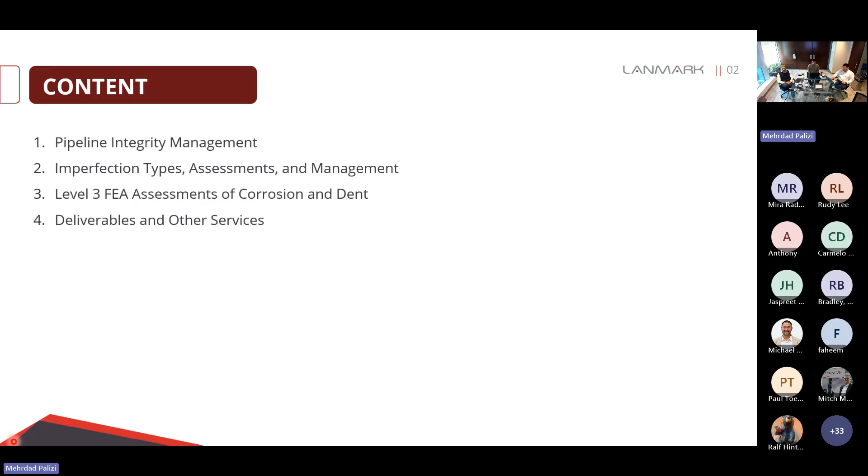So I'll start with an overview of pipeline integrity management, or PIM, and its key elements. Then I'll introduce the imperfection types covered in our program, explain their causes, assessment methods, categorization, and management at a high level. Next, I'll walk you through the process for Level 3 FEA assessment of pipelines with corrosion and dents. And finally, I'll present the typical deliverables for pipeline defect assessment projects and briefly introduce other stress engineering services we support.

As we all know, transmission pipelines provide a safe and efficient way to transport energy products over long distances. This network continues to expand and diversify with emerging services such as hydrogen blends, carbon dioxide, and biofuel transportation. As pipelines age and operating conditions change, threats can develop and grow over time. In case of transmission pipelines, failures are rare, but even a single event can have serious consequences, affecting public safety, the environment, business, and reputation.

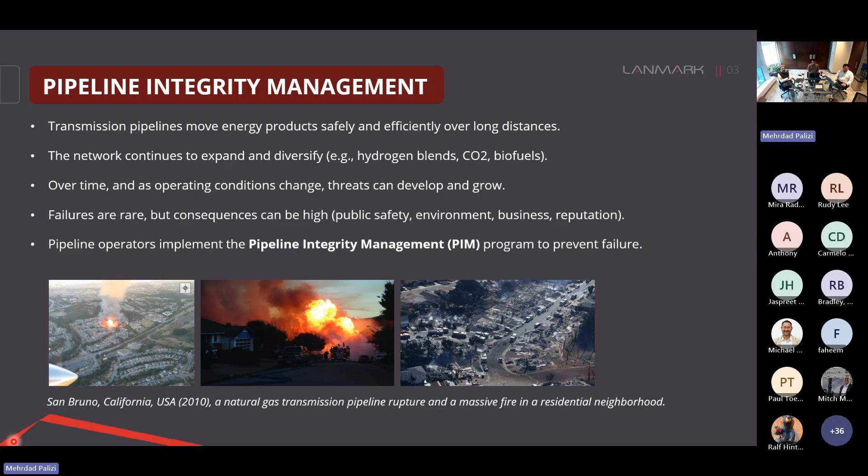In order to prevent failures, operators implement something called Pipeline Integrity Management, or PIM program. The images shown here are related to the 2010 San Bruno incident, where a natural gas pipeline ruptured in a populated area. This was because of a crack in a seam weld that grew unstably during a pressure excursion, caused a major explosion, and tragically killed 8 people. So we want to prevent incidents like this from happening.

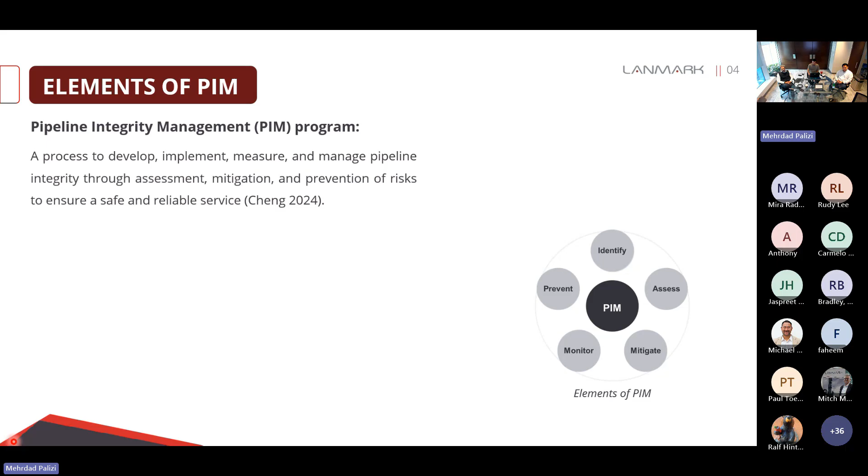So what is pipeline integrity management, or PIM? This is a structured process to develop, implement, measure, and manage pipeline integrity. It is done through assessment, investigation, mitigation, and risk prevention, to make sure that we have a safe and reliable service. A typical PIM, as shown in the figure, includes 5 essential elements: identification, assessment, mitigation, monitoring, and prevention. Let's take a look at each one of these elements in some more detail.

Caliper tools are used for measuring pipe inside geometry; they can detect deformation anomalies. We have magnetic flux leakage, or MFL, which is used to detect metal loss. Ultrasonic or UT tools measure wall thickness and are used for metal loss detection, and some models for crack detection. We also have electromagnetic tools that are mainly used for crack detection.

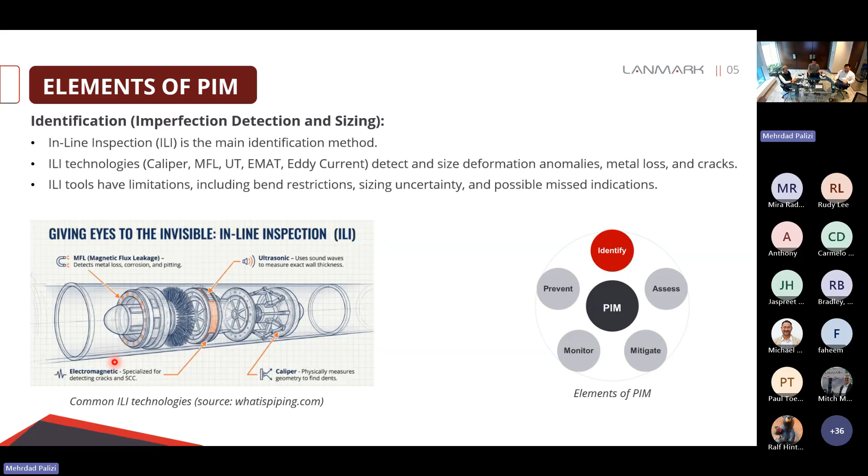ILI tools have practical limitations. They may not be able to pass through tight bends depending on the configuration of the tool. In addition, the ILI technologies have detection and sizing uncertainties. So here we have 2 examples of the technologies for corrosion.

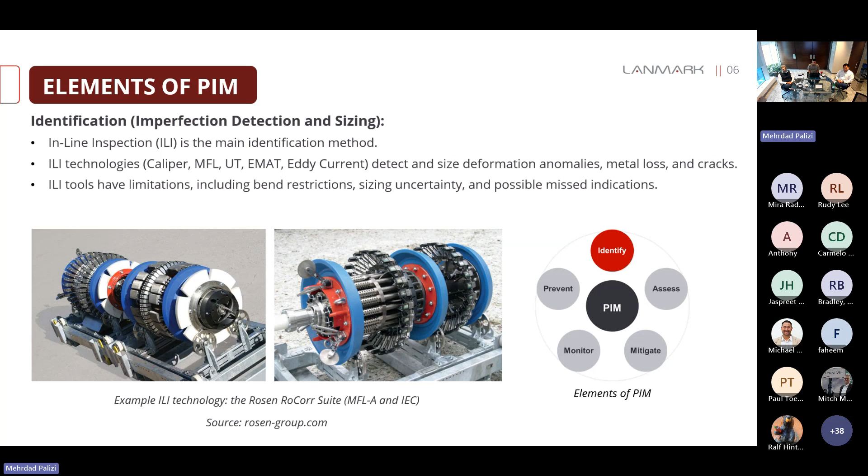MFLA is used for detecting and sizing metal loss, such as corrosion and pitting. IEC provides high-resolution detection for internal metal loss. Both these technologies have a minimum bend radius of about 1.5 times outside diameter. MFLA depth sizing is generally about 10 to 15% of the wall thickness, while IEC depth sizing is about 1.3 millimeter. Both technologies have a probability of detection of 80%.

The next element for PIM is assessment. This is where the collected data is used to make sound engineering decisions. The 3 main types of assessment include consequence, risk, and fitness for service, or FFS assessment.

Consequence assessment looks at the potential impacts of a pipeline failure over people, the environment, and operation in general. Risk assessment estimates the overall risk of a pipeline failure by combining the likelihood of that failure with its consequences. And finally, fitness for service, or FFS, checks whether a pipeline with identified imperfections can continue to operate safely under operating conditions. FFS is the focus of this presentation.

Here we are using ILI data, operating conditions, and maintenance records to assess immediate and future integrity of the pipeline. This is done typically by estimating the failure pressure and remaining life because of wall thinning or fatigue failure.

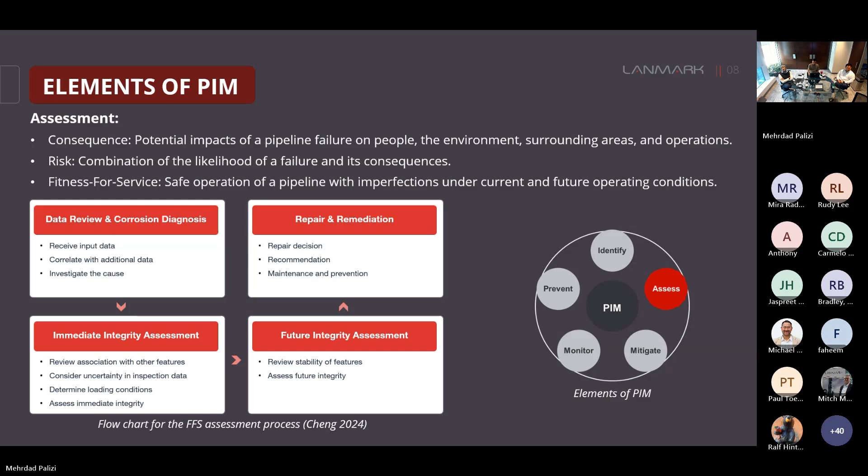Next, we have mitigation. This might be required when FFS is showing that an imperfection is unacceptable. After excavation and field inspection, if the defect was present and as severe as it shows itself in the ILI data, then a repair should be applied. There are different types of repairs depending on the type of defect and its severity. Common options include pipe replacement, composite sleeves, grinding, and metallic sleeves.

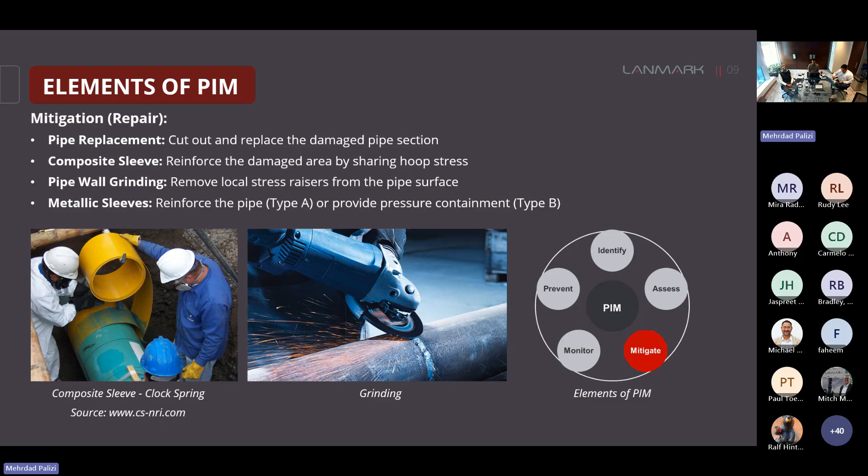Pipe replacement removes the damaged section of the pipe. However, this method requires line outage and it is not preferred. Composite sleeves reinforce the pipe by sharing the hoop stress, so they can be used for longitudinal defects. Grinding basically removes the local stress risers over the pipe.

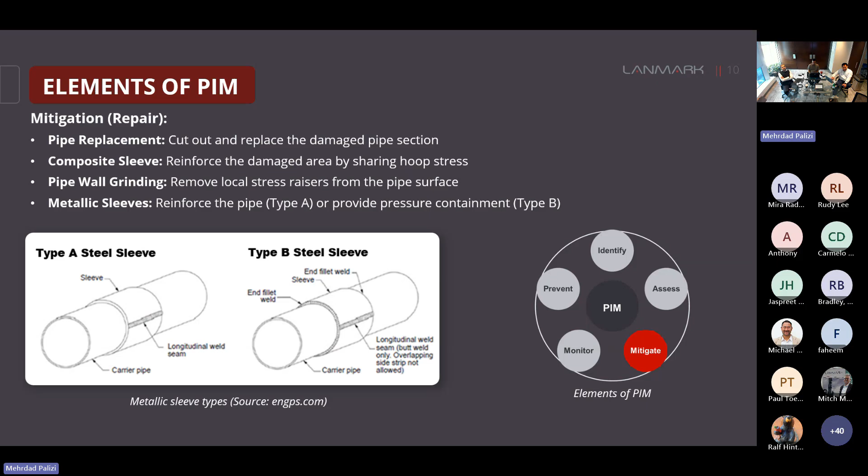We also have metallic sleeves that are commonly available in two forms. Type A sleeves provide reinforcement, and in type B, we have the sleeve welded to the pipe. This type provides pressure containment, and it is generally used for more severe defects for which we might have leakage.

Next, we have monitoring. This is going to be the ongoing follow-up component for integrity management. Operating conditions like pressure, temperature, and flow rates can be monitored continuously. But for most integrity threats, the monitoring is performed periodically.

This typically is done through repeat ILI runs to identify new imperfections, and we can also track the growth of known features. There is also non-destructive testing that is used to verify ILI findings, improve sizing accuracy, and at the same time it could also be used when ILI capabilities are limited.

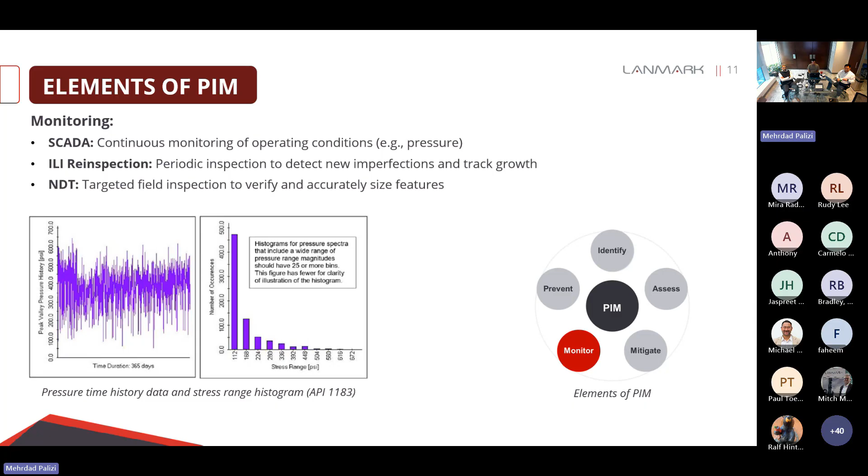So let's say if we have a girth weld for which we have a high demand of stress or strain, we can do the inspection over that with non-destructive testing.

The last element of PIM is prevention. Prevention starts early. One of the things is having a strong quality assurance and quality control during manufacturing and construction. This can help us to reduce defects from the beginning of the line life cycle.

Also, during operations, there are activities that we can do, including having an effective inspection program, excavation damage prevention, real-time surveillance, having procedures for repair, response planning, and emergency shutdown systems.

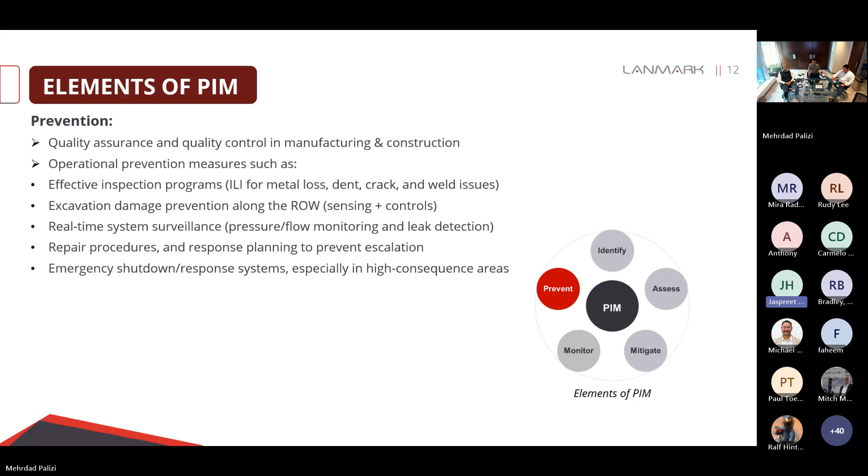Okay, so next I'm going to talk about the primary imperfection categories that we have in our program.

The first feature is corrosion. Corrosion is the most common time-dependent integrity threat for pipelines, especially the ones that are buried. There are two types of corrosion, external and internal. External corrosion is more common. It is driven by electrochemical reactions between the pipe steel and surrounding environment.

External corrosion is controlled by coating and CP. External corrosion starts when the coating degrades or fails. It becomes more severe when CP cannot effectively reach the steel. There is also internal corrosion. It is generally less common in transmission lines, but it can occur when water or deposits accumulate inside the pipe.

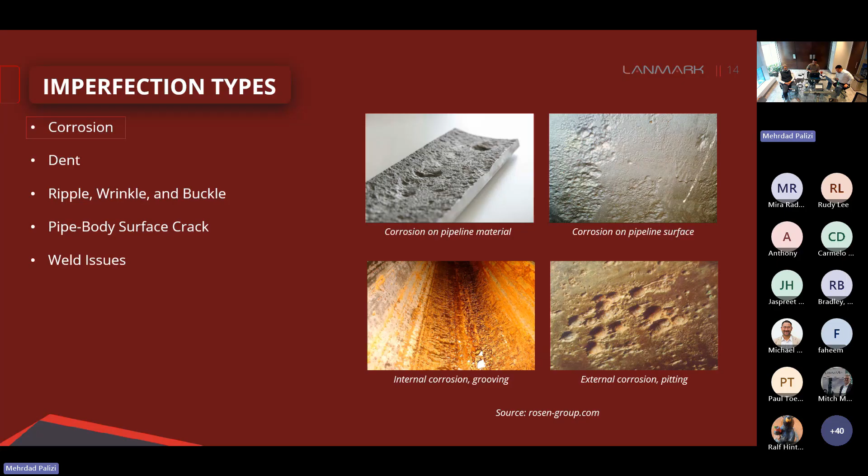Next, we have dents. This is going to be an inward plastic deformation of the pipe wall. It is usually caused by external mechanical forces, such as construction activities or third-party excavations. It can also occur when the pipe is forced against a hard object below the pipe, such as rocks or buried debris.

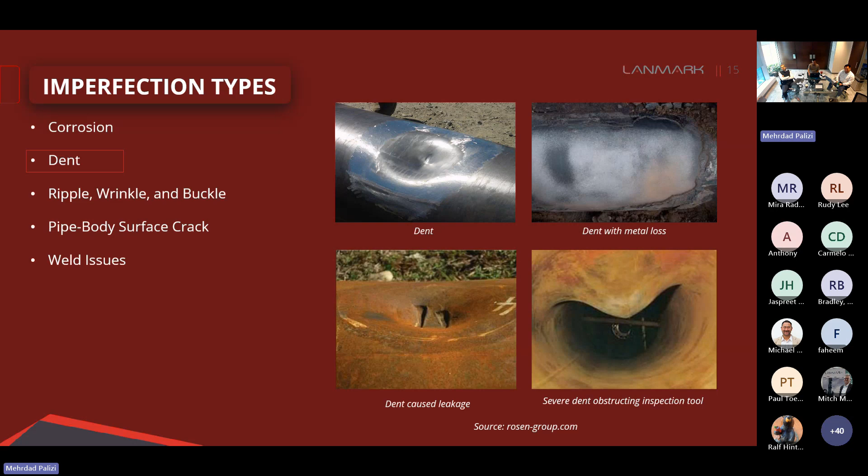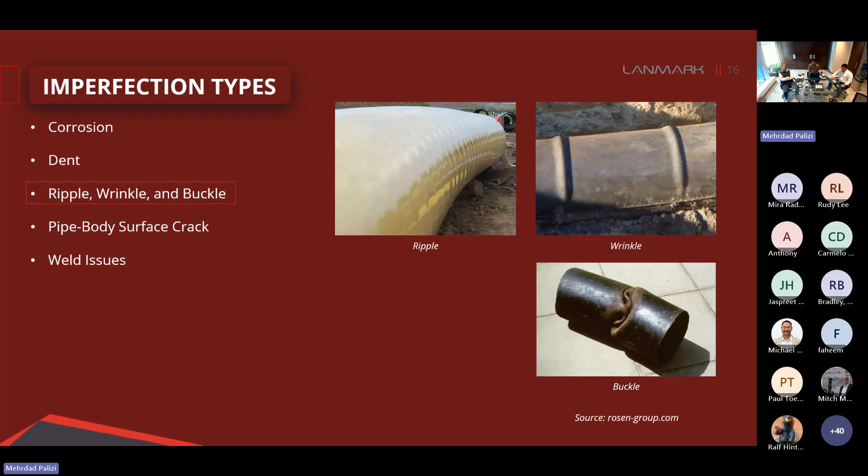Next, we have buckle-type features, including ripple, wrinkle, and buckle. These features are caused by a local compressive load over the pipe. The source of this load could be pipe bending, ground movement, or installation issues.

Surface cracks over the pipe body. This is another important feature. One common mechanism here is environmentally assisted cracking, particularly stress corrosion cracking or SCC. Here we have tensile stresses working together with a corrosive environment to initiate and grow cracks.

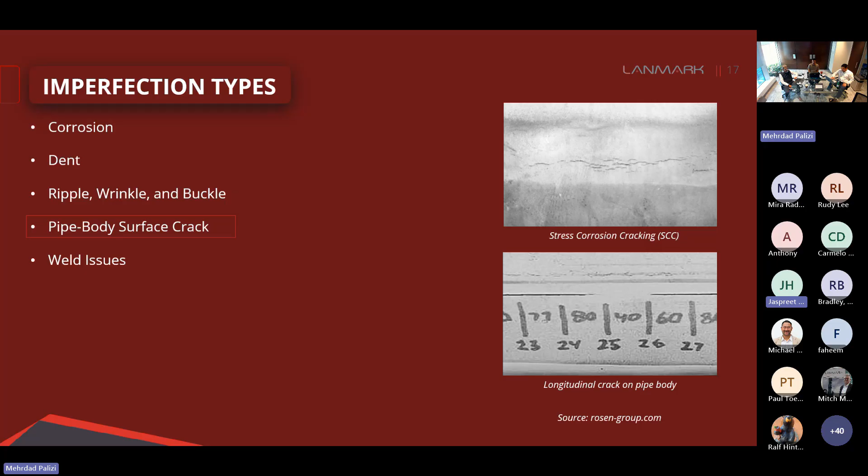Cracks can also grow by fatigue. This is going to be over the critical locations that we have stress concentration. There is higher levels of stress and strain at this location, and during pressure cycling, cracks can develop and grow over time.

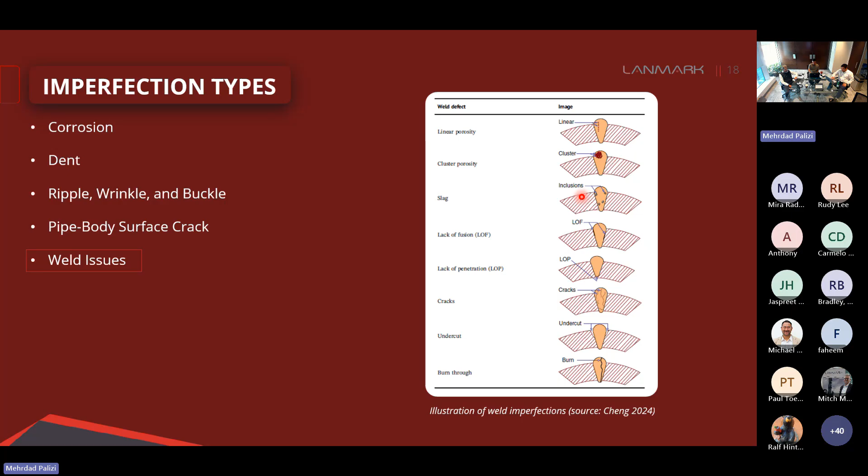And finally, one other category is weld imperfections over seam and girth welds. So here we might have planar flaws such as cracks, undercutting, or lack of fusion. They could also be volumetric flaws like cluster porosity, slag inclusion, or lack of penetration.

Weld areas are more susceptible in comparison with the pipe body. This is because the weld and heat affected zone around it might have different metallurgy. There might also be residual stresses at these locations if post-weld heat treatment is not performed.

The main integrity concern about weld issues is that they might behave like cracks, and under operating conditions, they might grow over time.

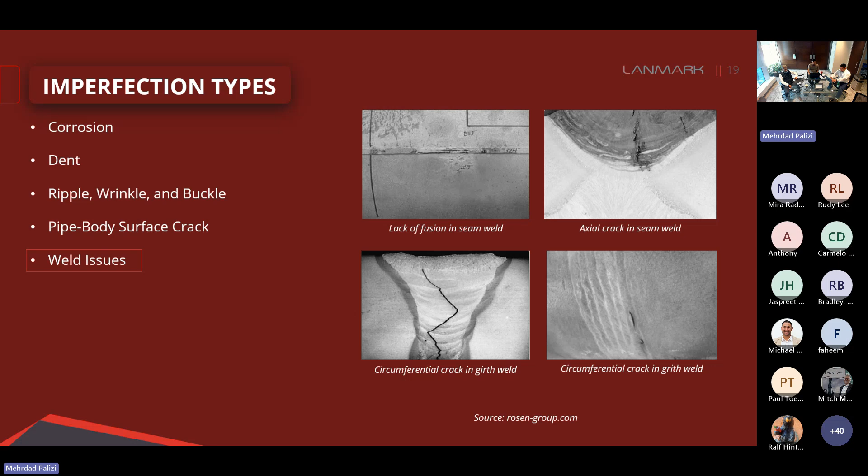Any questions so far?

So in our program in Canada, we are using CSA Z662, Section 10, Evaluation of Imperfections, as our basis. This provides the screening limits to us and then directs us to more detailed engineering assessment when those limits are not satisfied. For doing engineering assessment over corrosion, we are using ASME B31G together with the supporting reports and technical papers in this manual.

Dents are assessed based on API 1183. API 579 is used for assessment over cracks and weld issues that are behaving like cracks. In order to do this, we are using Part 9 in this standard. We are also using Annex 2D here to do level 3 assessment over corrosion. And finally, we have ASME B31.8S that is providing us the basis for doing categorization over defects.

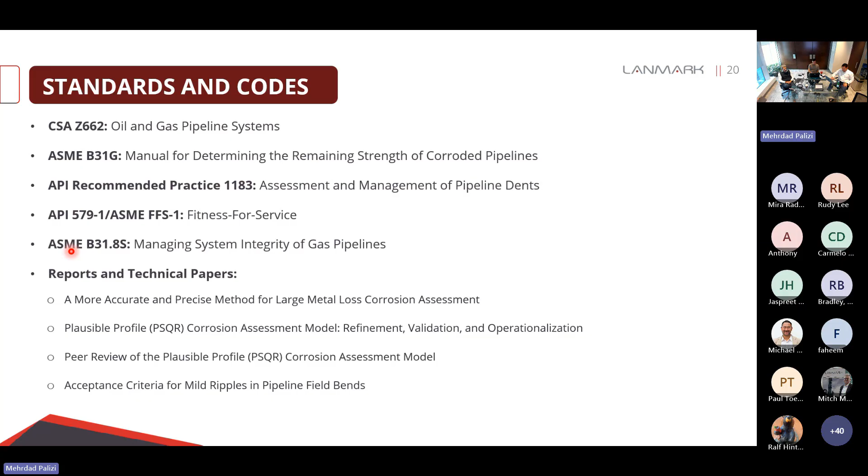So there's some consideration when we are performing imperfection assessment. Here I have 3 notes that I go through one by one. The first thing is we are not assessing features only in their as-found condition.

There's some features that are time dependent, let's say corrosion. For these features, it is important that we have an estimation over the growth rate. This could be done by reviewing the historical ILI data. We might also do a literature review and come up with a conservative value.

After we figure out what is the growth rate for each one of the features, we should project them to the time for the next ILI inspection. Then we're going to perform FFS.

This is going to be performed for both the current and projected condition of the features. Key outputs here include the failure pressure and remaining life. In the case of corrosion, this remaining life is because of wall thinning. And in the case of cracks and dents, it is going to be governed by fatigue failure.

Then we're going to have categorization and action planning for each one of the features. So we categorize features as immediate, scheduled, or monitored. Immediate features are the ones that are unacceptable at the current condition.

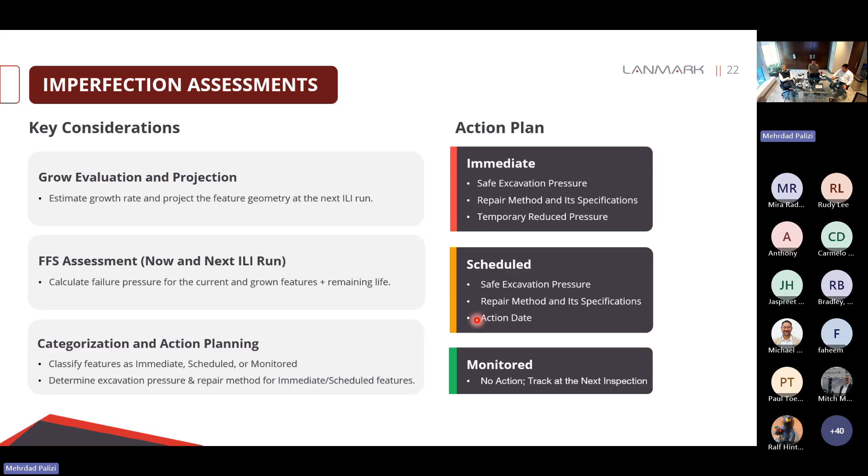In the case of scheduled features, we should also provide what is the deadline for doing that repair.

So when we are doing imperfection assessment, we are generally using a three-level approach. Level one is screening. Here we are using fast, simple checks based on the feature dimension and operating data. It is basically for screening out low-risk features. Then we have level two assessment, which is going to be more detailed.

Here we are using the elaborated data for our features. Let's say in the case of corrosion, we are using the thickness grids for the corroded area. In the case of the dent, we are using the deformation data, specifically the longitudinal and transverse profiles through the peak of the dent.

And then we have level three assessment. Here we are using numerical methods like finite element analysis. It is used for features that are too complex for doing level one or level two assessment over them, or based on those levels, the feature is unacceptable.

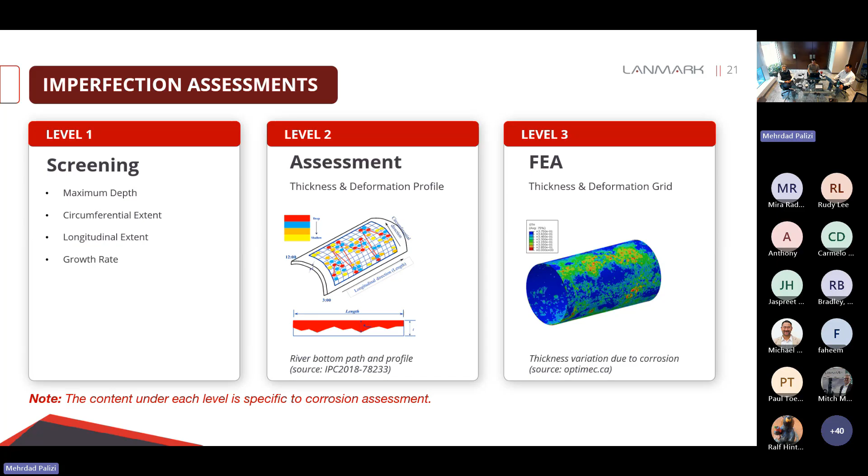This slide shows the three-level approach we apply at Lanmark for assessing different types of imperfections. For corrosion assessment, we start with CSA screening, then progress to ASME B31G modified formulation. If the data is available, we can also do an effective area method.

If the feature still fails at level one, we move to level two and do an RSTRENG or PSQR modeling over that feature. We can also go to level three and perform a finite element analysis based on API 579 Annex 2D.

Similarly, for the rest of the features such as dent, buckle-type features, cracks, and crack-like issues, we have methods for analysis in three levels. In future webinars, we'll go through the details of these imperfection types and the assessment for each one.

In terms of commercial software, we use Abaqus, Fe-safe, and Isight for finite element analysis. For corrosion, we use RSTRENG+ and KAPA. For cracks and crack-like issues, we use KAPA and INSPECT. We also have internal Python scripts to assess deformation anomalies and perform CSA screening.

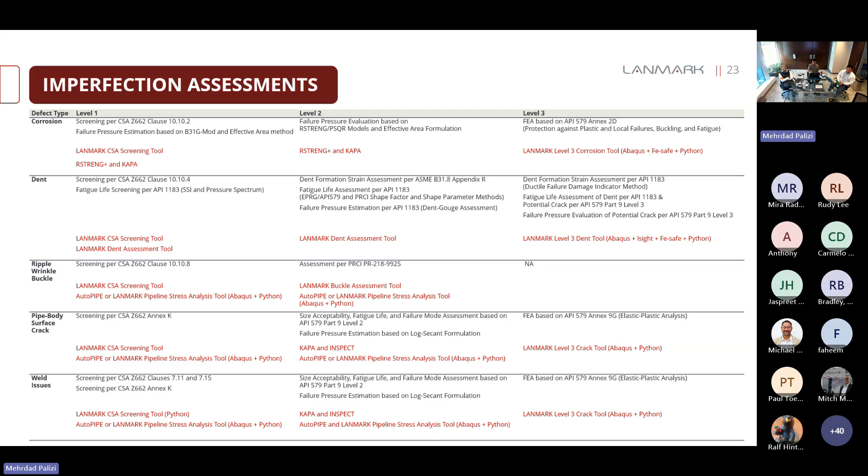In some cases, such as a circumferential pipe body crack, a crack-like flaw over the girth weld, or buckle-type imperfections, the longitudinal stress is the driving force, not the hoop stress. In these cases, it's essential to have an accurate assessment of the stress state at that feature location. This can be done using AutoPipe, or we can use our internal pipeline stress analysis tool.

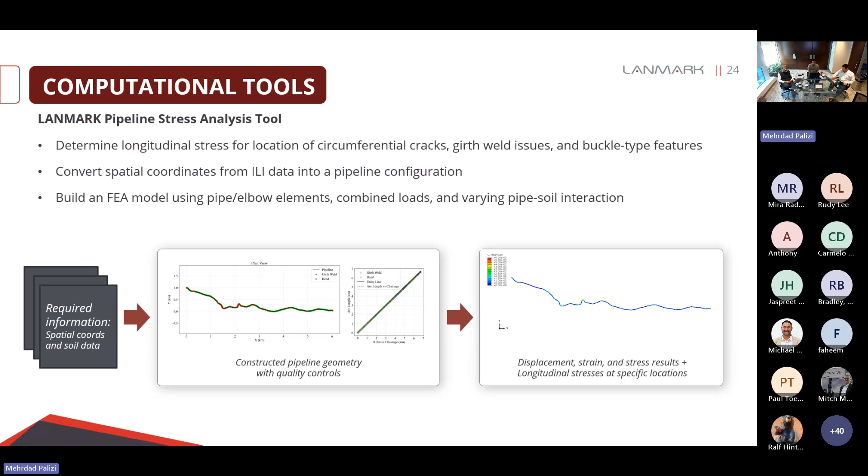Our internal tool is an Abaqus Python script. It builds the pipeline configuration directly from ILI coordinates. We use pipe and elbow elements, with plasticity and nonlinear geometry included, and we can also include varying pipe-soil interaction if that data is available.

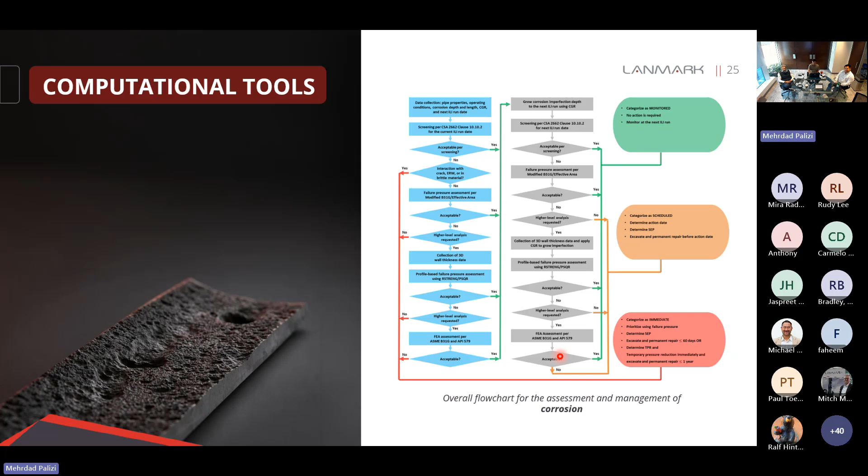When a feature is unacceptable, no matter what level of analysis we applied, we can use CSA Z662 Table 10.2 to select an appropriate permanent repair method. The table here is just...

We have a question: is it possible to reduce corrosion in these pipes by using caustic? Sorry, can you say that again please? Is it possible to reduce corrosion in these pipes by using caustic?

That may be a question we'll have to come back to. This is more of a defect assessment webinar, so I don't have that answer right away, but we can get back if the person shares their detailed contact details. Okay, thank you.

So the table here is just part of the table from CSA Z662, Table 10.2. The table is focused on metal loss defects. In the case of corrosion, the code allows us to do pipe replacement. We might also apply different types of repair sleeves. If using composite reinforcement, the metal loss should be less than 80% of the nominal wall thickness.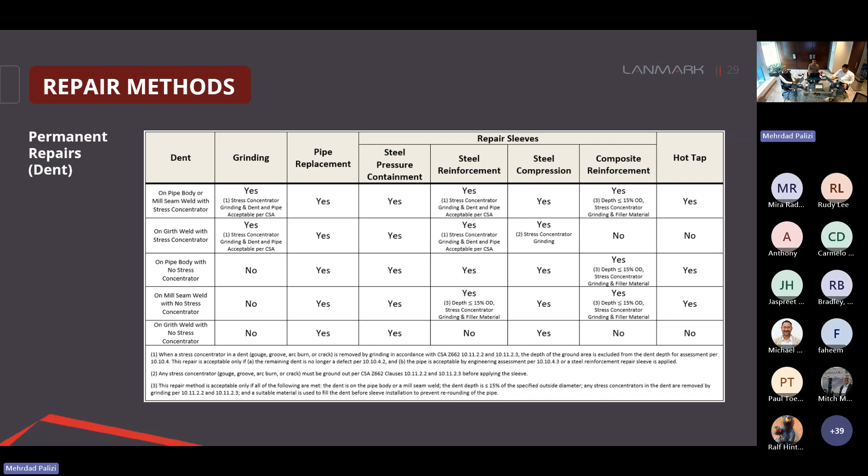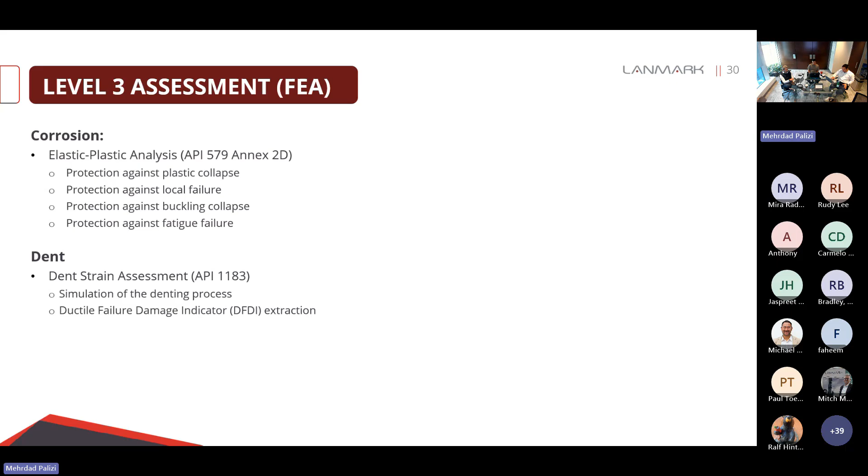Next I'm going to talk about two level 3 assessments, for corrosion and dents. We're going to focus on the general workflow and some technical considerations, starting with the assessment for corrosion.

In the case of corrosion, CSA Z662 and ASME B31G are useful for doing level 1 or level 2 assessment. ASME B31G provides some general guidelines for level 3 assessment, but it's not detailed or step-by-step. Because of this, we adapt the stress analysis framework in API 579 Annex 2D for doing level 3 assessment over corrosion.

It's important to mention this code itself is based on the ASME Boiler and Pressure Vessel Code, Section 8, Division 2, Part 5, which is the code used for design by analysis over pressure vessels. So if we have a pressure vessel with complexity in its geometry or loading condition, this is the code used for designing those types of structures.

One other important thing is that the approach in Annex 2D is not just limited to corrosion. It can be used for many types of imperfections. In the next slide, I'm going to show you one example related to shell distortion. But generally, the steps will be the same as when we're doing analysis over corrosion.

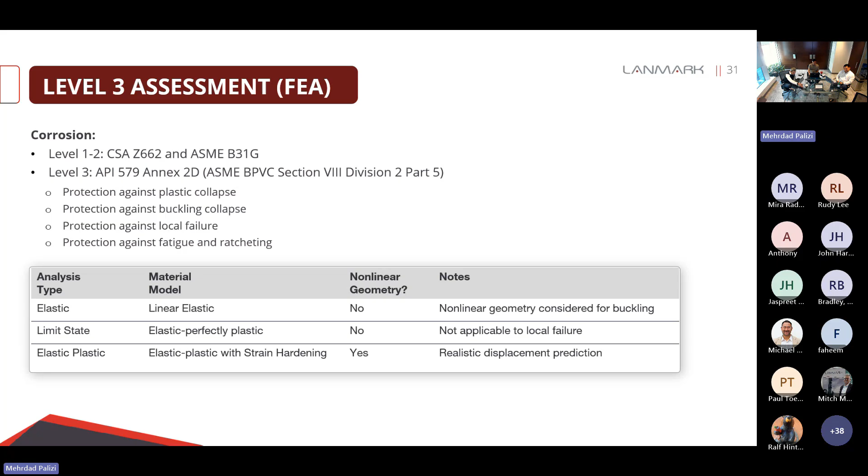So let's go through one example. This is an example in API 579 example problem manual. This is example 7 in section 8. It was actually added to the book recently. It illustrates the main steps for doing an elastoplastic analysis using Annex 2D.

The structure that we have here is a vertical pressure vessel. It is subjected to internal and external pressure. We also have dead load, and there is also wind applied to the structure. This structure contains some shell distortion, and we're going to use Annex 2D to make sure that the structure is safe.

So the first step for doing this type of analysis is to create the CAD geometry in the finite element software that we have here. And then we're going to do discretization over this model, so we're going to have a meshing applied over this geometry.

Once we have that discretization, now we can model the imperfection. So let's say in the case of the shell distortion, we can do this by adjusting the nodal coordinates in the input file in Abaqus. The input file in Abaqus is a text file, and we can go through that text file through scripting and change the coordinates of the nodes. This way we can have shell distortion applied over a structure.

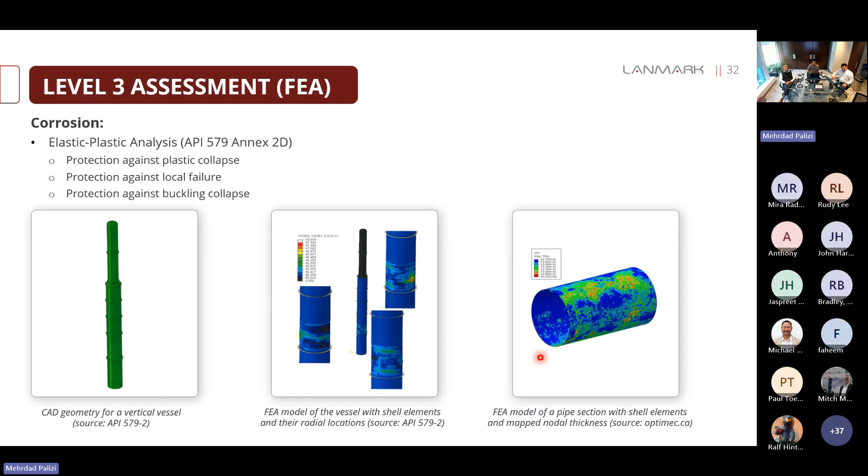So after we did the modeling for the geometry, discretized it, applied the imperfections, and applied the boundary conditions, now we can go and do those checks one by one. The first check that we have is protection against plastic collapse. So what we do is we go into table 2D3.

This is going to give us the load combinations and factors for elastoplastic analysis. We go into the global criteria. Here we have two load cases that are relevant to our structure: one is for internal pressure and gravity, the other one is for the time that we also have wind load applied to the structure.

We apply these loads over the structure, and then two things can happen. When we are running our analysis, we might get convergence, which means that our structure is safe against plastic collapse, and we might get divergence. If we got divergence and we are sure that every setting in our model is correct, then that could be an indication that the structure is not able to tolerate that level of loading.

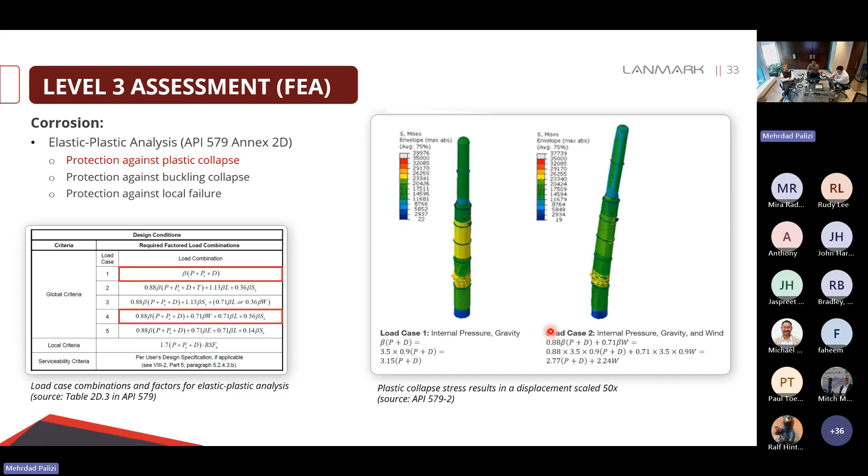The second check is for buckling collapse. If we are doing linear analysis, this is going to be very different from plastic collapse. But in the case of the elastoplastic analysis, we are basically doing the same procedure. The only difference here is that for buckling analysis, we are applying the load cases that are producing compressive stresses inside the structure. So for this example, we have the same load combinations, but instead of internal pressure, we're going to apply external pressure.

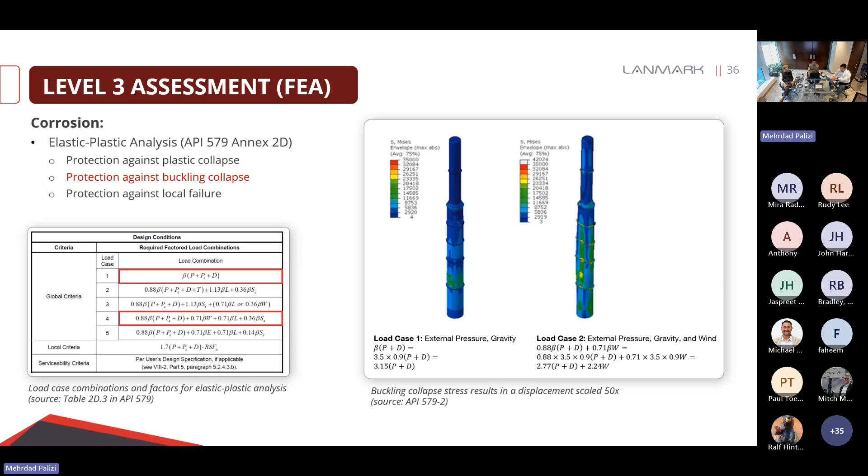So finally, we got the check against the local failure. Here again, in table 2D3, we're going to have the relevant load combination. We're going to apply this load combination over the structure, and then we're going to get different principal stresses, von Mises stress, and equivalent plastic strain. Based on these variables, we're going to have a calculation for a strain-based failure limit. I'm going to go into details for what this limit is. But for now, we're going to do the calculation for that limit at every point in our model. We're going to get the maximum value. If the maximum value was less than 1, that means our structure is safe against local failure.

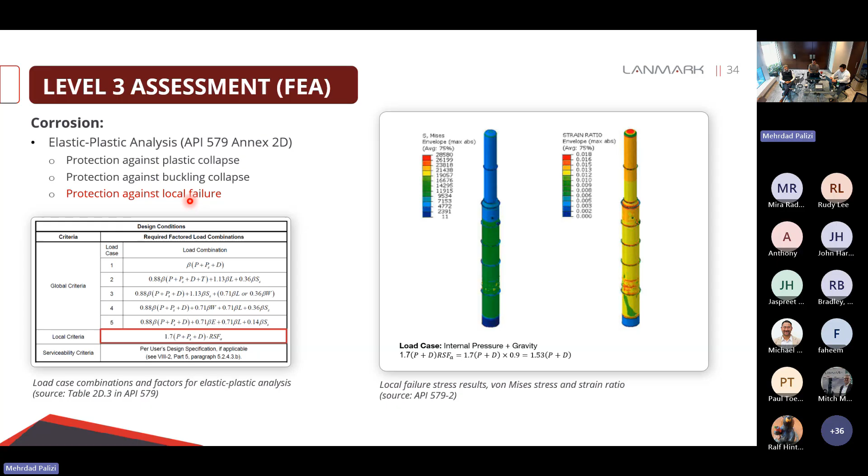But what is that strain ratio? That's the strain-based failure criteria. It is a strain ratio, basically demand divided by capacity. The demand is equivalent plastic strain, and the capacity is something called limiting strain. So let's go through the calculation for an example and see how this is done.

So the first thing is we should know what type of material we are working with, what is the yield stress and tensile stress for that material. Actually, we need the ratio of yield to tensile stresses. We also have some outputs from our finite element software: the principal stresses and the equivalent plastic strain. So what we do is calculate the average stress and the von Mises stress, and then calculate the ratio of the average stress to von Mises stress. This is an important variable, called the stress triaxiality. In many failure criteria, you might see this ratio.

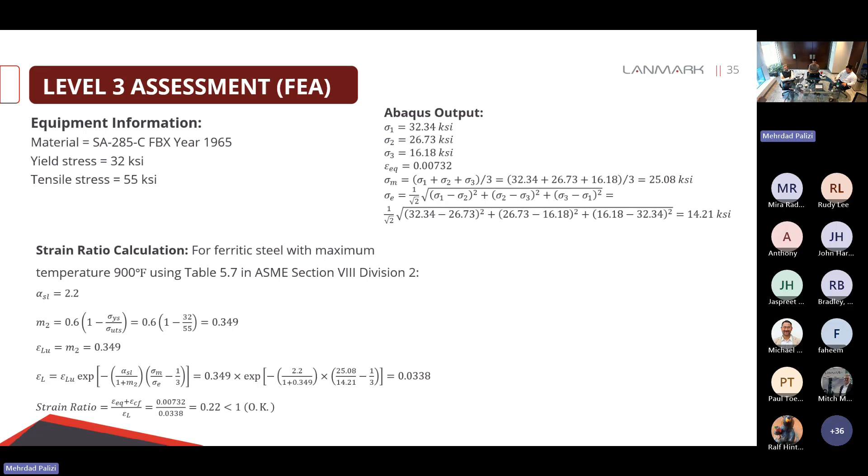So after those calculations, we're going to get some material properties. We go into table 5.7 in the ASME Boiler and Pressure Vessel Code, Section 8, Division 2, to get the material constants. This is the limiting strain, but just for the case of uniaxial stress. So if we put it into this relation, we're generalizing it for the multi-axial stress state we're dealing with. We get the limiting strain, and then equivalent plastic strain divided by limiting strain. If the value is less than 1, that point in the structure is okay against local failure. Any questions so far?

So next, I'm going to talk about the level 3 assessment for dents. In the case of dents, we have two main steps. The first step is dent strain assessment. Basically, we want to quantify the amount of damage in that indented area at the time we had the indentation. The second part is doing FFS assessment, for the fatigue failure of the dent. If in the first step we got a severe dent, then probably we're going to have a crack inside that dent, and we should be mindful of the fatigue life and failure pressure of that crack. We can make some assumptions about the dimensions of that crack, but probably the best way is to do inspection over that area, figure out if we have cracks there and what their dimensions are, and then continue with the assessment.

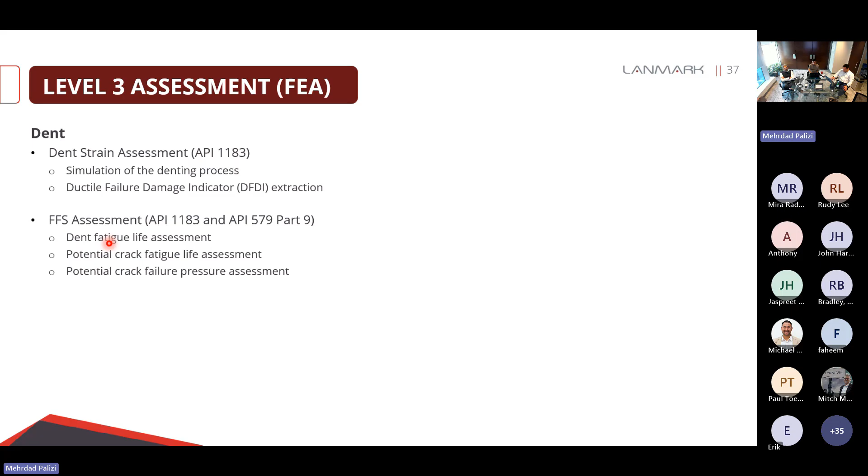So today I'm going to go into details for the dent strain assessment. Hopefully in the future we'll have webinars talking about dents and also cracks separately. So here we've got two main steps. The first step is simulation of the denting process.

Actually, this is going to be the most challenging step for doing analysis over dents. So what we do here is we have the CAD geometry, and we also do discretization over it. It's good practice to have refined mesh at the places where we have contact between our indentor and the pipe. Next step, we define an indentor, and we define contact between the exterior surface of the pipe and the indentor. And then we apply displacement over this indentor.

After we are finished with the indentation process, we're going to have the pipe pressurized. So what we do is apply some full pressure cycles. This is basically because in reality, due to pressure fluctuations over the indented pipe, we're going to have some plasticity formed at some locations, and with these full pressure cycles we're going to capture that plasticity. At the last step, we're going to just increase the pressure from 0 to the pressure at which the ILI measurement was performed.

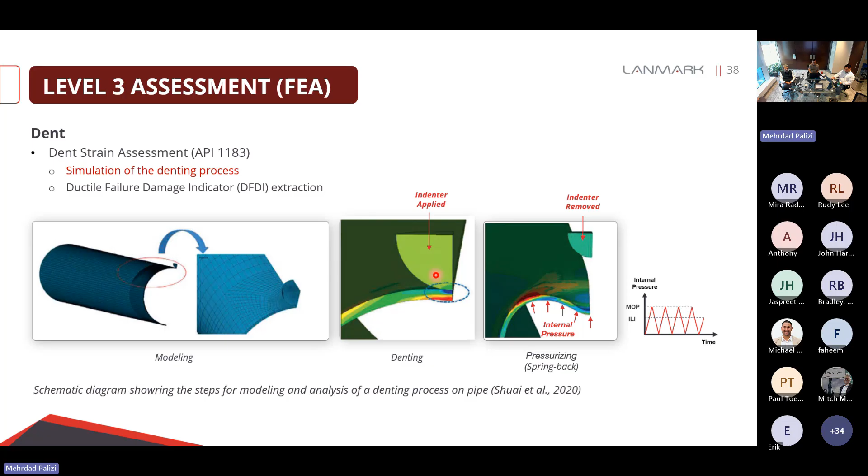So what is the challenge here? The challenge is that once we are finished with our modeling, we should do a comparison between our simulation and the ILI data. If our simulation is not matched reasonably over the ILI data, then we're going to have to go back to this step, change the dimensions, the shape, and the movement of the indentor, and repeat this process until we get a reasonable match.

So the next step, we've got the calculation for quantification over the amount of damage during the indentation. This is done with, actually there are more measurements in API 1183. The one we have here is ductile failure damage indicator, or DFDI.

DFDI, just like the strain-based failure criteria for corrosion, is going to be a demand divided by a capacity. The demand is equivalent plastic strain. The capacity is something called fracture strain. Fracture strain comes from this relationship.

As you can see here, we have some consideration for the stress triaxiality, and we also have this epsilon 0. This is the critical true strain at the start of crack initiation. Its value is between 0.3 and 0.6, according to API 1183. At the same time, we can also use this relation to figure it out if we have the material information.

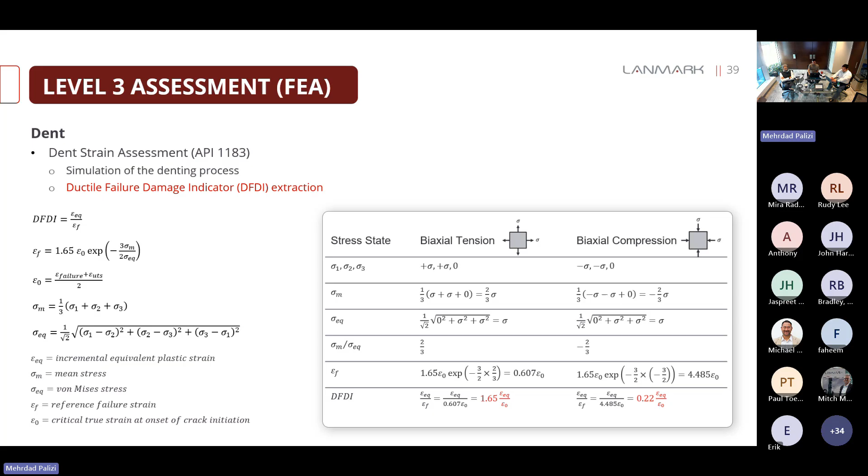This is consistent with the mechanism for ductile failure. Ductile failure involves initiation, growth, and coalescence of microvoids, and this is more susceptible to happen for tensile stresses. So basically, in this relationship, we are taking care of that note about the stress state.

So in terms of the deliverables, we're going to have a preliminary assessment. This is for the time that we have ILI run completed. What we do is we have the ILI data collected and reviewed.

Then we're going to have an estimation for the corrosion growth rate. This could be based on literature review. We might use a method like half-life, or we might also review the historical ILI data to get this value.

Then we're going to have calculation for the failure pressure and remaining life. For different features, the remaining life is for different types of failures. It might be because of leak or burst in the case of corrosion, or in the case of crack and dents, it might be because of fatigue failure.

So some of the features that we do assessment over them are going to be in a critical situation. Then we're going to have those features targeted for doing dig investigation.

In addition, we're going to have a pipeline risk assessment. This is going to be with subject matter experts. There's going to be a lot of parameters to consider for this risk assessment, as you can see here.

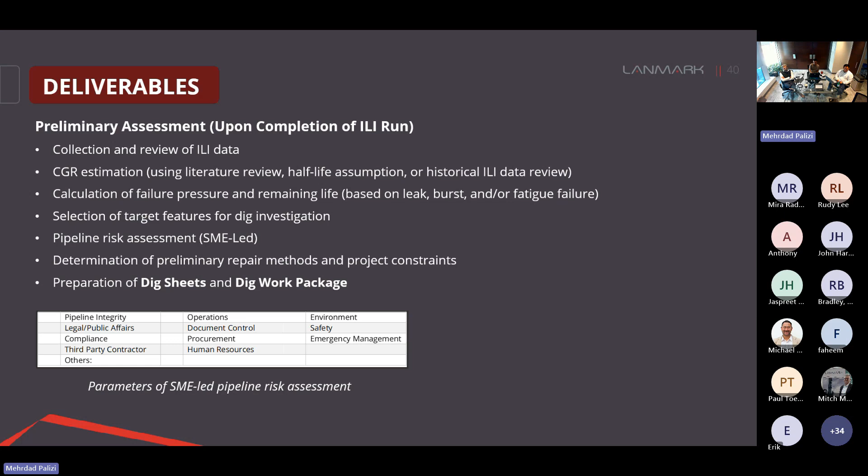For the features that are unacceptable, we're going to have a preliminary repair method, and also we're going to define the project constraints. And then we have a preparation for the dig sheets and dig work package.

So what is in the dig sheet? In the dig sheet, we have the excavation site location, the feature description, the feature location, and pipe joint identification. Here we've got information like the length for the joint that has the flow inside it, and also the adjacent, as well as the wall thickness.

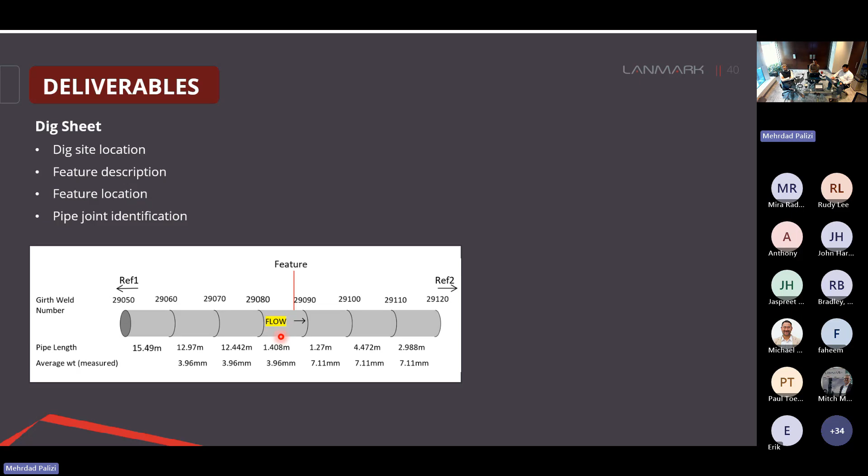So this information is very useful for the crew that want to do the repair. They can check the length, they can check the wall thickness, and make sure that they are digging the right spots.

There is also a dig work package. Here we're going to have the pipeline information, the restricted pressure. This is going to be a percentage of the failure pressure. It is for the time that the crew are doing the field inspection and they're doing the repair.

We also have the identification for the target feature, what was the recommended repair methodology, the instructions for doing the field inspection, and also the requirements for safety and emergency response.

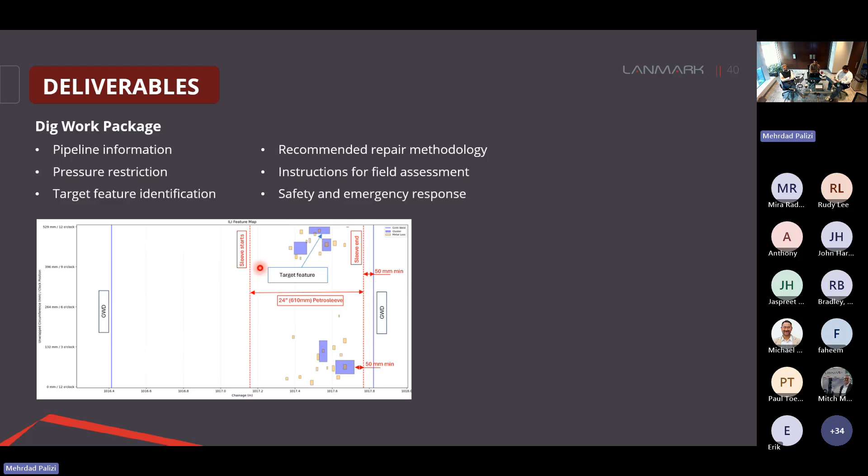So here basically we are taking over this segment of the pipe. We can see different features that we have over this segment. Which one was the critical feature that we have? This one was our targeted feature. And also, what is our preliminary repair method over this, the start of the sleeve, the end of the sleeve, and also the specifications for that sleeve.

So after the field inspection is finished, we're going to have another set of integrity assessment. This time we're going to collect and review the field inspection reports, and have a correlation between the field inspection results and ILI reported anomalies. Basically, we want to verify the feature locations and their severity.

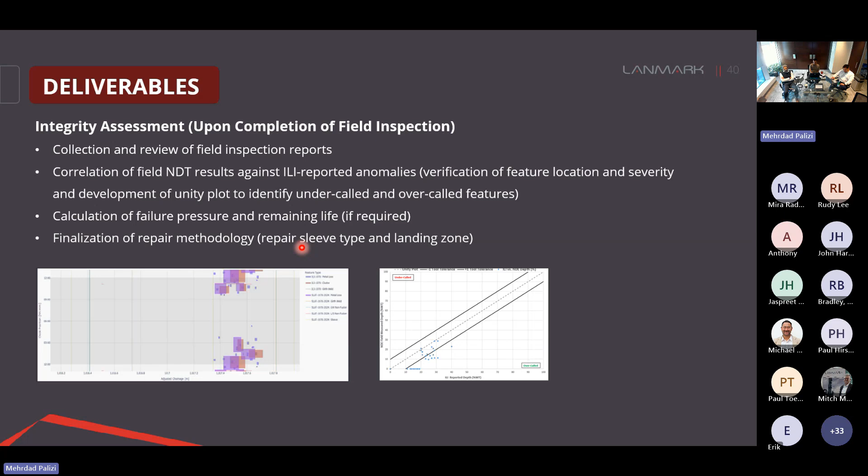And then we're going to do the finalization for the repair methodology — what type of sleeves we want to use, and what is the landing zone for those sleeves.

And then we have the post repair documentation and the final risk assessment. This is done after the field repairs are finished with the crew working over the pipeline. So we're going to create drawings and documents required for recording the repair.

Then there's going to be the determination for the next ILI run date and also technologies to use in that ILI run. So in the field inspection, we might see some features like cracks, and we don't have tools for them in our previous ILI runs. It might be a good idea to have tools like shear wave ultrasonic, some advanced models of ultrasonic, for detecting cracks over that line.

And then we're going to have the final pipeline risk assessment. So we did assessment over the pipeline, we did the inspection, we did the mitigations over the pipeline, and probably our risk is going to be lower at this stage. And then we complete the management of change process.

In terms of Lanmark, our team, our stress engineering team, is supporting both facility and pipeline projects. On the pipeline side, we can do pipeline stress analysis, defect assessment, as I mentioned today. We can also do elevated temperature assessment, geohazard and hydrohazard assessment, and some supplementary calculations.

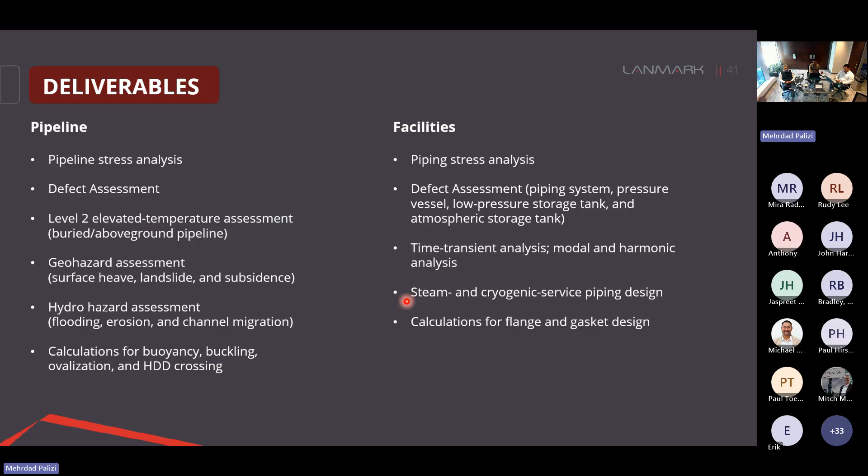In the case of the facilities, we can do piping stress analysis. We can do defect assessment for piping systems, pressure vessels, and storage tanks. Dynamic analysis, including modal, harmonic, dynamic explicit and implicit. Piping design for services with very low or high temperature, and some supplementary calculations.